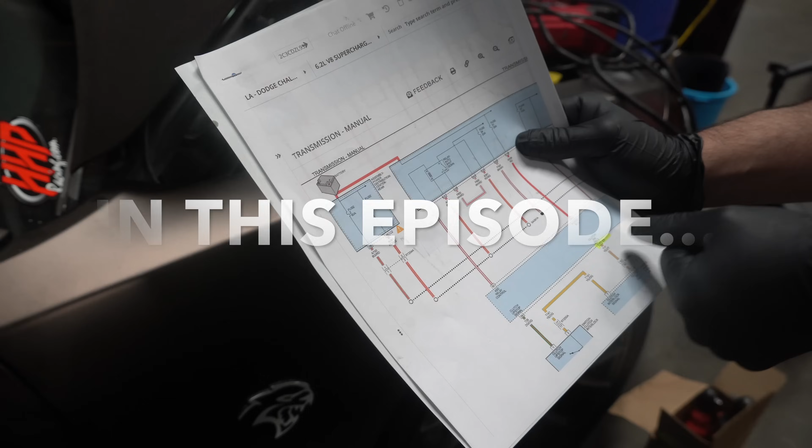We are minutes away. One, same connector, so it's the same connector. 2, 31, 32, 33, 3. Hold that thought.

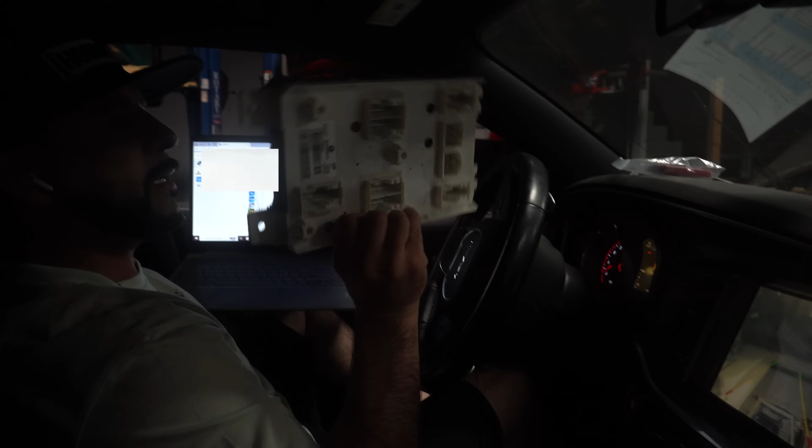So what do you got for him, my guy? All right, so again, BCM, the Charger and Challenger, they look exactly the same. But inside, when you take these clips off, circuit boards change. So I keep, I don't really look at comments and shit like that. My son does, so he's like, hey, this guy said this and this guy said that.

Yeah, there's people talking about we could have did this with HP tuners and stuff. No. And for everyone saying that they've reprogrammed BCMs and they've done this before, shut up, just shut up, because I know you have not. If you have, show me the proof and then I'll believe you.

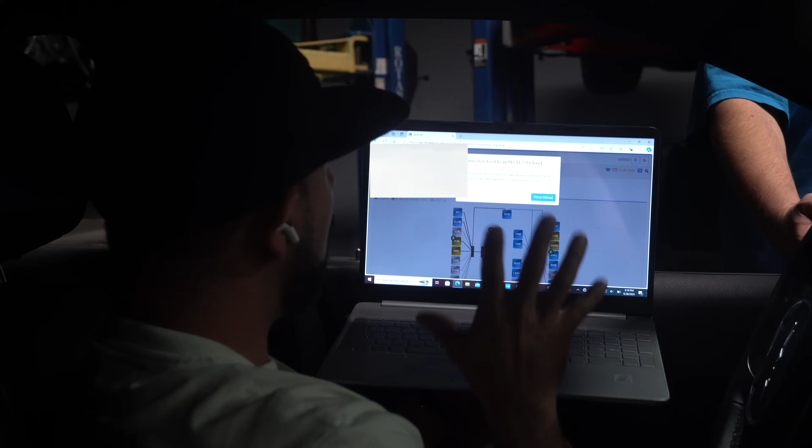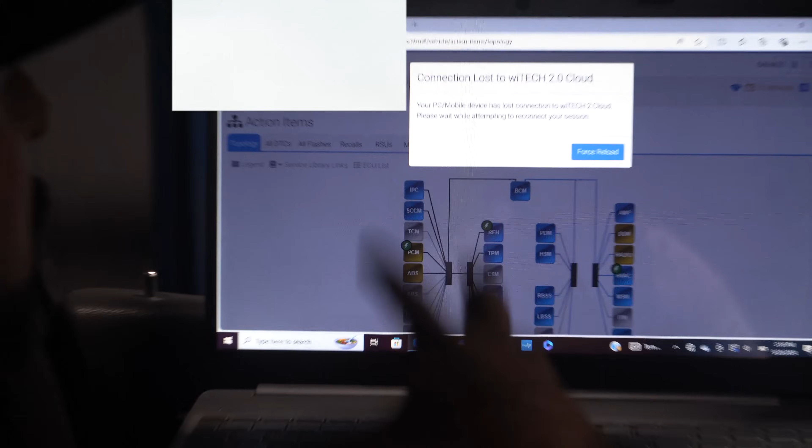On the previous video, I showed the TCM, transmission control module, and the ESM, the electronic shift module, which are in automatic transmission vehicles. So Keith went ahead and reconfigured the BCM, telling it basically the BCM is a gateway module that talks between the PCM and the radio frequency. So those were all lit up red, like error codes before.

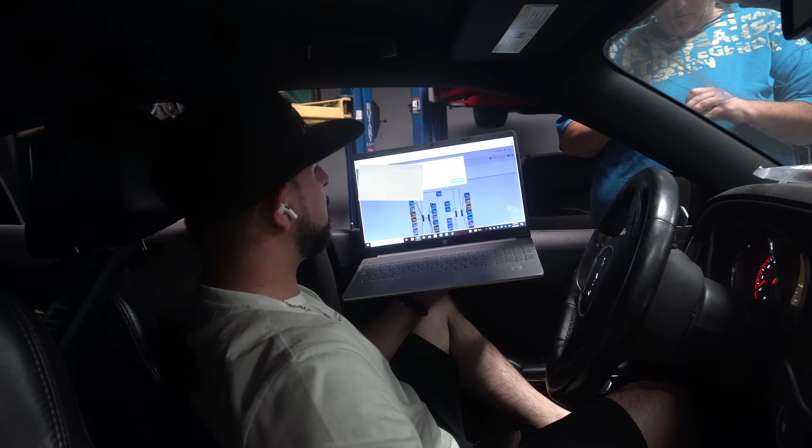So basically this BCM, what it is pretty much, when Keith goes in there, the software he uses is CDA. CDA is a software where it's kind of like a micropod. There's 3 stages: wiADVISOR, micropod, and CDA, which the engineers use. And they pretty much go in there and they tell it what it is: automatic transmission, click no; manual transmission, click. Yeah, they pretty much code it to manual.

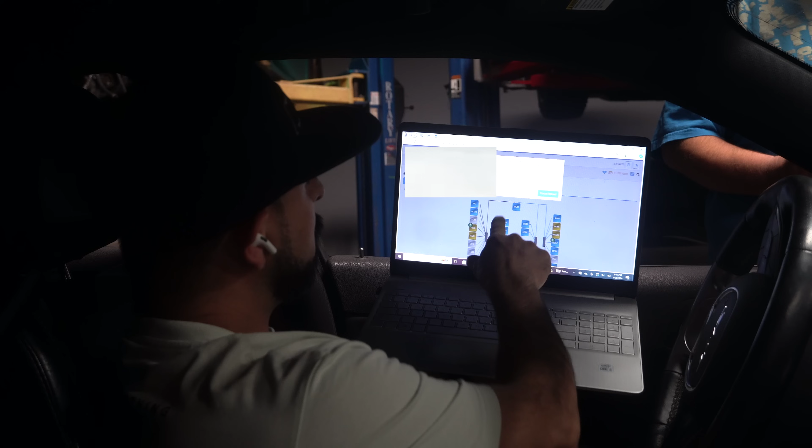So you could see that Keith did a great job, because now we don't have a TCM or ESM. It's grayed out, right? Normally when it's grayed out, it means that the module is not there anymore, it doesn't exist. So as soon as I reconnect, I went into the PCM data and it's telling me it's looking for a clutch input. And I just went in there as soon as you got here to see, as soon as I pressed in the clutch, it's not showing it changing for pressed or not pressed.

So now what I got to do is I need to make sure that our pins are correct in the PCM and that our wiring to the clutch cable or the clutch interlock sensor are in the right pins. Then once we get that, the PCM needs to see that the clutch is being pressed now that we don't have a TCM and an ESM. So that's what we're gonna do as soon as I get this password from my guy.

So right now we just gotta check each pin that we repinned over at City Alignment, or City Performance rather. So we gotta recheck that work, because right now it's not seeing that the clutch is being engaged, so that's why it won't start. The reverse issue is a different issue, and we'll figure that out after, but we're just trying to get this car started. If we get the car started, that's a huge weight off my shoulders and their shoulders. They've been putting in tons and tons of work behind the scenes, studying and doing.

And look, yeah, he came with some homework. Well, yeah, just in case my computer would drop off.

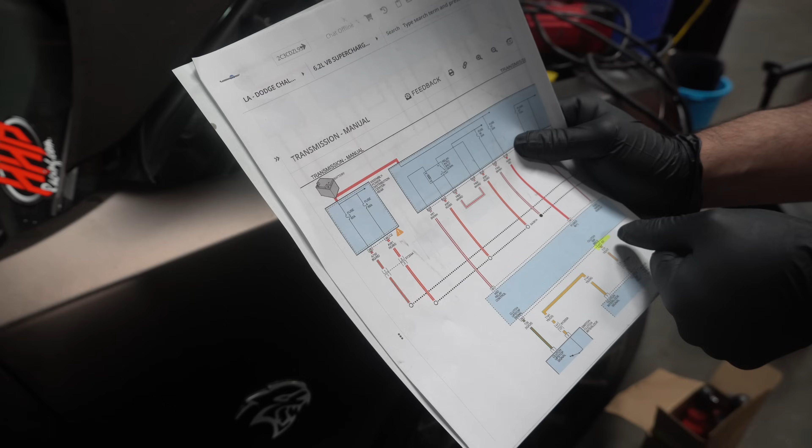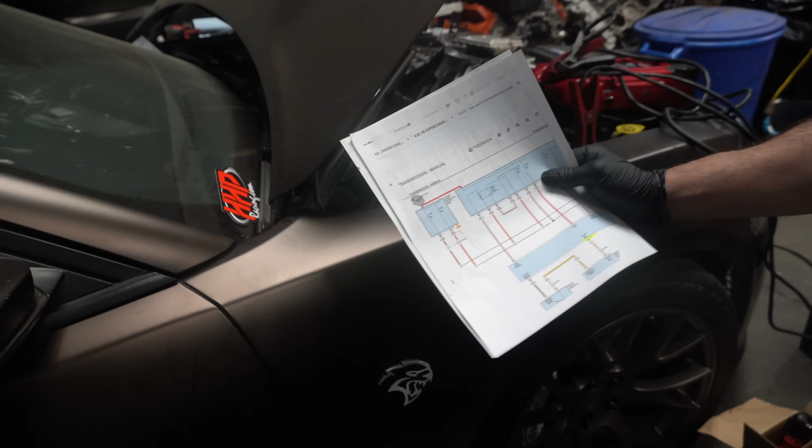This one goes directly from our PCM all the way to our clutch, so we need to make sure these are okay. Then we'll check our radio frequency. This is underneath the pedal, this is in the back of the car, and this is in the front of the car. So you guys see how I would have never got this car done?

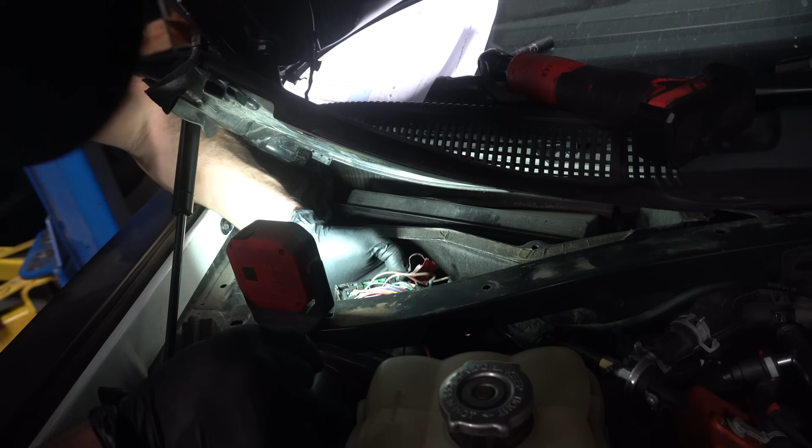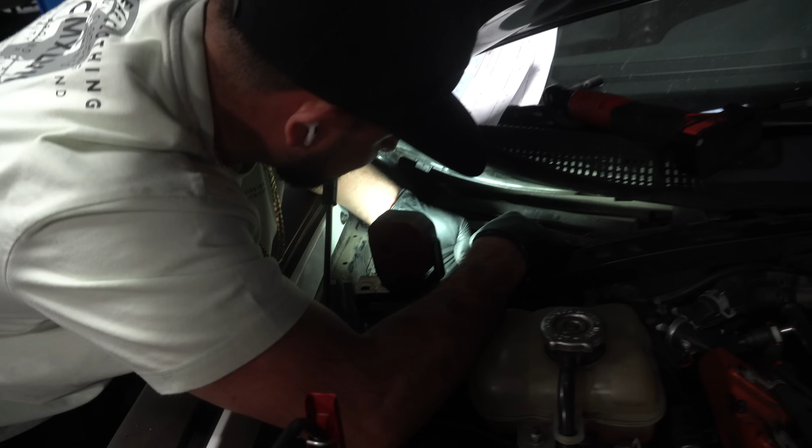For the people at home, which is C1 and which is C2? Is it the top one or the bottom one? I mean, just based off numbers, I would feel like C1's the top one, C2's the bottom one. Correct. What are they color-wise? Basically, they're pretty much both black connectors, one's a little bit tan, the other one, see how it's whitish and the other one's tan?

Yeah, so if you see, there's 96 pins, right? Is this pin 1 or is this pin 1? Where's pin 96? You see how it's different? Yeah, so a lot of people, there's a wire insertion side and there's the pin side. So you can look at this connector both different ways. But if you take the cap off, it's numbered in the back. This would be pin 24, and this would be pin 96 right here.

Now we figured out that one pin is in the wrong location. The information I got for wiring the clutch switch, the dude used all Challenger modules, so he obviously wired them to the Challenger modules. Since we're using all Charger modules, the pins have to go in different locations, and it's a little bit difficult, huh?

Yeah, so basically what we got going on, this is the back side of the connector. There's 96 pins. Pin 1 location is down here, and they go by 24s, so pin 1 to 24. A lot of people don't know if this is 25 or this is 25. It's not numbered, you only get 1, 24, 96, and 73.

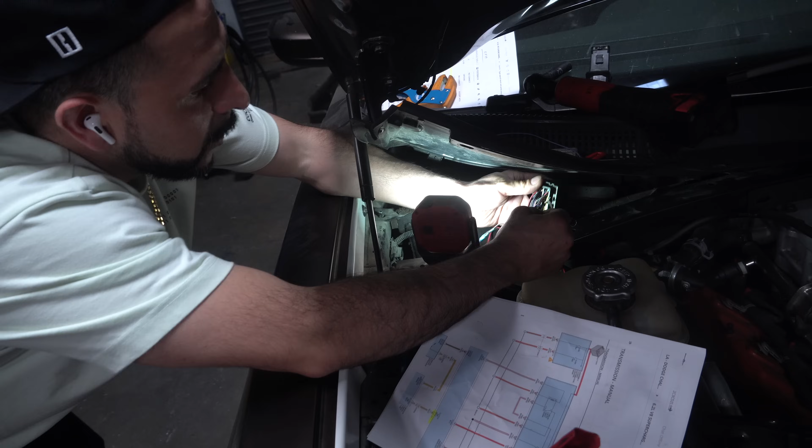So if you count these pins, it goes 1 to 24. This would be 48, so it goes 1, 24, 25, it goes on this location, so it'd be 25, 26, 27, 28, 29, 30, 31, 32, 33, 34. So they spliced into 34.

I mean, it's very tough, right? And we're supposed to be at pin 39, so we're a couple pins off. Now I have to get 35, 36, 37, 38, 39, so I just open up this cavity.

We're gonna go ahead and cut this connector off, plug it back in, just twist the wires real quick to make sure it works. Put in another pin to our clutch switch. This goes to our clutch switch, and then go check our data in the wiTECH, and then go from there, and hopefully we'll get a clutch signal.

So we're not getting a clutch signal. It's asking for it, but we're not getting it. Well, we're not getting it because we're on the wrong pin, which makes sense because it was wired for Challenger modules. Yeah, correct. So we'll do that and get back to you.

Finishing up this little pin real fast. And hopefully, we need a hopefully counter of how many times I've said hopefully this thing will start on this build, but I believe we are minutes away.

Wire is pinned, ECM or ECU is back in. Now we're going to check for clutch switch signal. All right, where's the key? In here somewhere, I think center console.

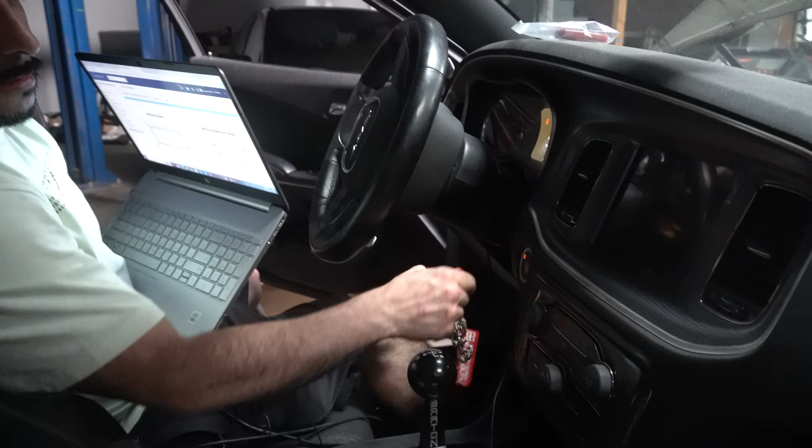Clutch switch interlock is filtered in the PCM. So it's off, right? Press in, clutch off. It should switch, but we still don't see it.

So what I'm gonna do now is get both of those wires and see if 1 and 3 is switched. Whole lot of trial and error, guys. A couple wires under the dash going to the clutch switch are a little loose, so he's cleaning that up and making sure they're well connected.

I'm pushing the button. No.

What was that? Oh my God. Wait, let me give it a try. Let me just hold that thought. No, we're not holding nothing, it's a mess. Sorry guys, sorry, don't worry about any of this. Here it is, hold on. Ready? 1, 2, 3.

Whoa! Oh my God, is it killing itself? Yeah, a little bit, we got some figuring out to do. That might have something to do with the tune, and holy shit, it started.

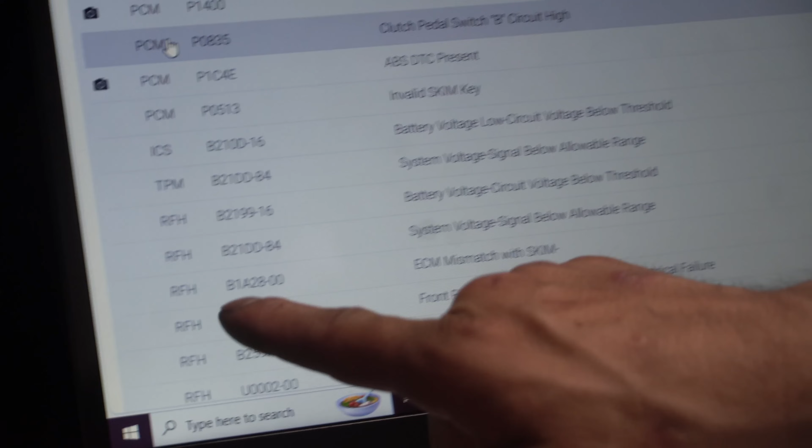If you look here at the RFH, it says ECM mismatch with SKIM. So that's why it's dying out - my radio frequency hub has a mismatch with the SKIM key code, so that's why it's dying.

Okay, so now we have to figure out how we could - hopefully my boy Keith knows how to do something with the RFH, to where we can allow that key code to talk to it. Because basically the RFH modules look exactly the same, but inside the circuit board's changed.

Different, yeah. So motherfucker started, so I'm sure you're wow. Yeah, so I could smell the E85 you got on here too. Yeah, I mean, that's huge, bro.

That's very huge. I have low battery voltage, it won't even crank anymore. I'm dead. All right, we gotta figure something out. As you guys heard, it starts now.

We have a couple more things to figure out. We were trying to use the charger radio frequency. The BCM is from the charger, that we had reprogrammed by Keith. Shout out Keith.

He did that, he's got the engineering software. He's a bad dude, he fucking did it for us. He switched your gear ratios too, by the way. Huge shout out to him, because otherwise my speedo would have been all fucked up.

A bunch of shit he changed in the body control module, which is the gateway. And then we tried to use the charger radio frequency, because we had used the Challenger, but it reads off the VIN, right? So we wouldn't get anything. The pins were off a little bit on the PCM. We fixed that wiring issue.